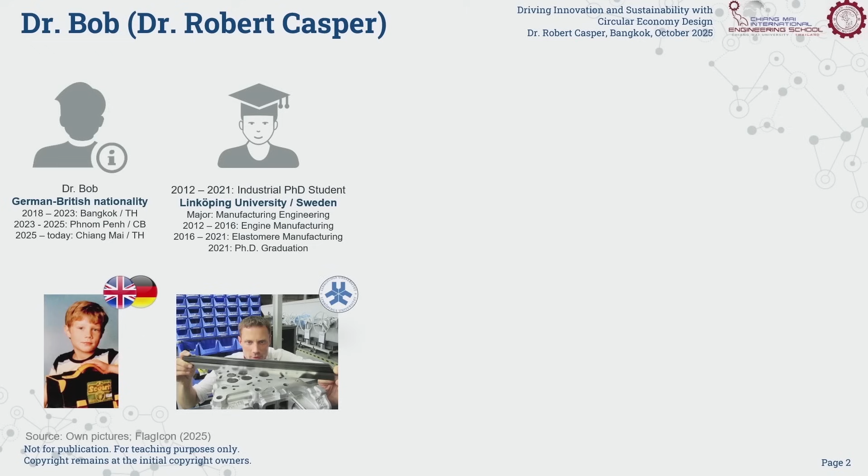And probably some of you know the colleagues Matthias and Eric. They used to be my PhD supervisors. And Linköping in Sweden is very much focusing on circular economy, and I just can recommend that also as a university contact partner to you if you want to have future partners in academia in that area.

Now today I'm a lecturer at Chiang Mai University after studying and working at Thammasat and doing lecturing in supply chain, circular economy, operations, research methodology and production controlling. But especially, I also do research.

I do a lot of research on sustainable production methods. I do papers, and I'm still assigned for my research topics with Thammasat University, with my old boss, Ruth Banomyong, with whom I work on research on circular economy.

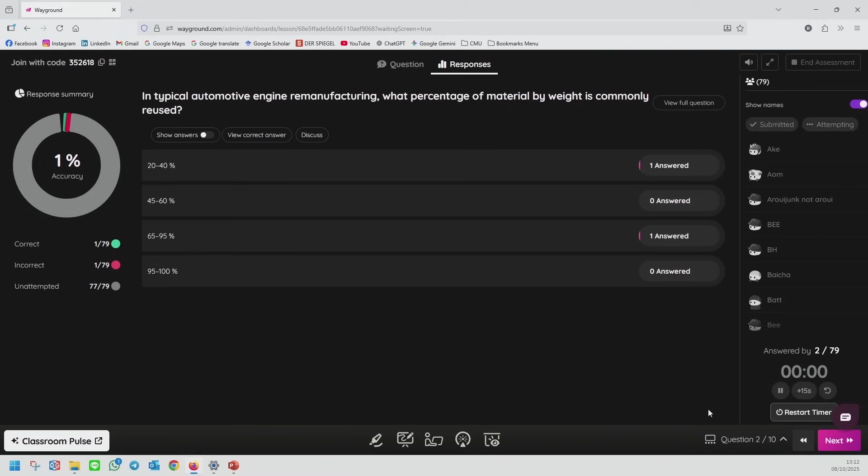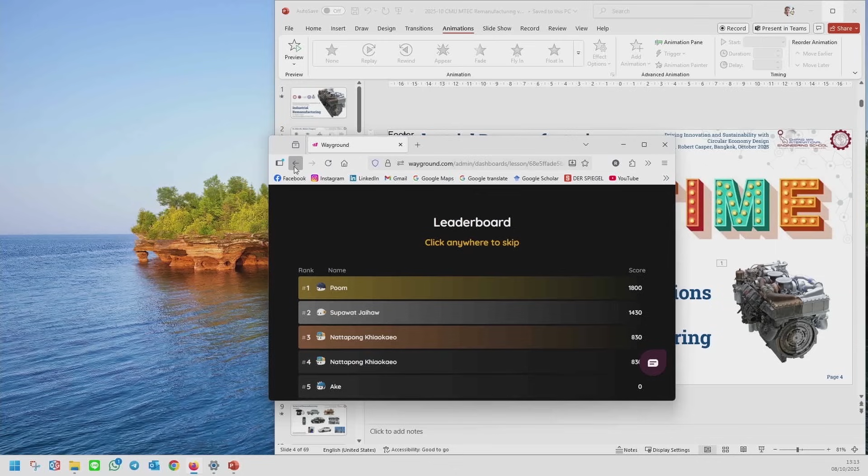Okay, good, let's hope that it works now. 52, 53. Well, at least the first question should be easy now. Okay, 62. 1, 2, 3, 4, and we start. Now it works, but where is it? Is it still at question 3? You see the first question? Okay, so first question again: what, according to international standard, must be true?

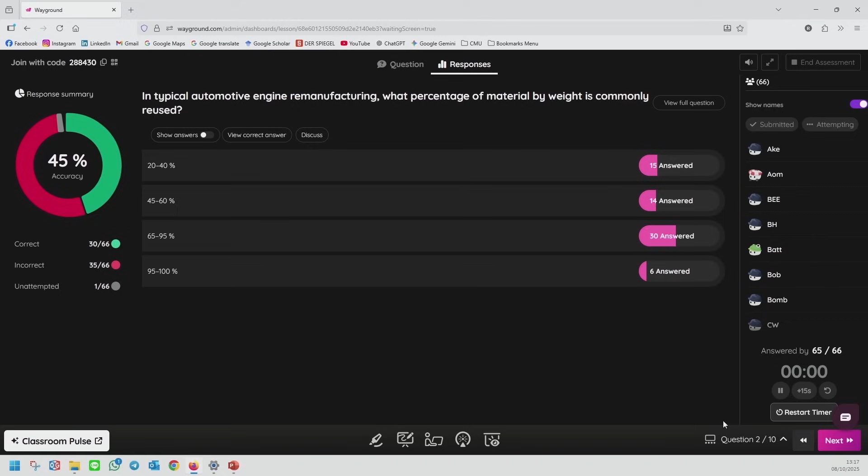And this one is not so difficult because actually I gave you already a little help. 64. 2 seconds, 1 second. All right. So there we are, okay, 65 to 95% of material, right? If you would weigh the metal, how much metal can be reused? Okay, very good.

Number 3, now this is a new one. Empirical studies show that remanufacturing an engine compared to new manufacturing can save approximately how much energy? Not material, energy: 10 to 20, 30 to 40, 60 to 80, 90 to 95%. Not talking about material, we're talking about energy now.

Remanufacturing an internal combustion engine, petrol engine, can reduce CO2 emissions by approximately how much compared to new production? So now it's not energy or material, now CO2: 15, 35, 55, or 75% of CO2 emissions reduced.

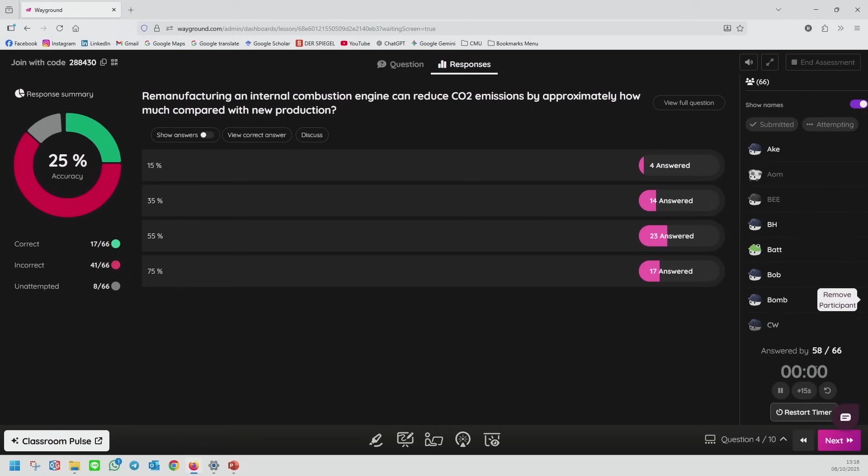Which factor most strongly influences profitability in engine remanufacturing? What makes remanufacturing of engines profitable? Energy cost per kWh, core acceptance rate, number of machining stations, or building size?

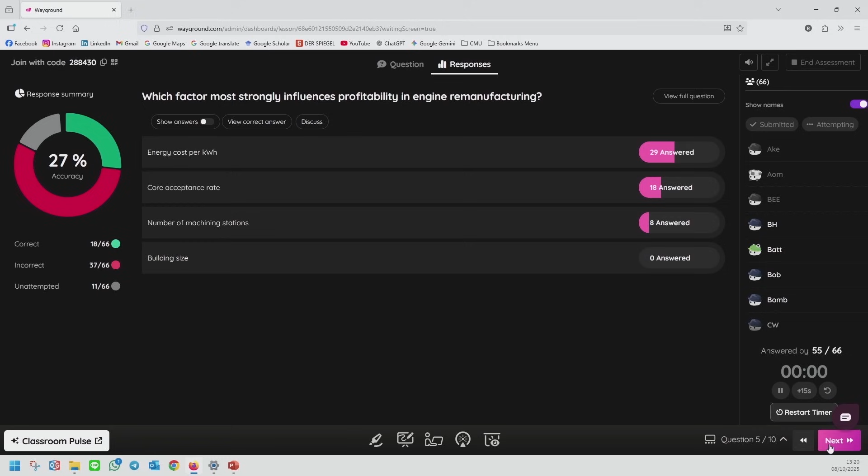Okay, we have a change to BH. But many people say energy cost. Energy cost in remanufacturing is not the most important thing. The most important thing is to have a core part. The core part is the old part which you put into your process and remanufacture and give it a new life. If you have a low acceptance rate, not good core parts, that is not good for your remanufacturing business. So that's the most important thing, the core acceptance, having good cores.

Which of the following is the most critical uncertainty in remanufacturing? Packaging material, core quality, customs import procedures, or warehouse lighting conditions? What brings uncertainty into remanufacturing?

Very good, so that's kind of the same story. If you receive a core which is not good, you cannot remanufacture it. But the core, when it comes from your customer, you do not know in which quality it is. So that's uncertainty. It's difficult to plan the core quality before you receive it. So that is a source of uncertainty, right? B.

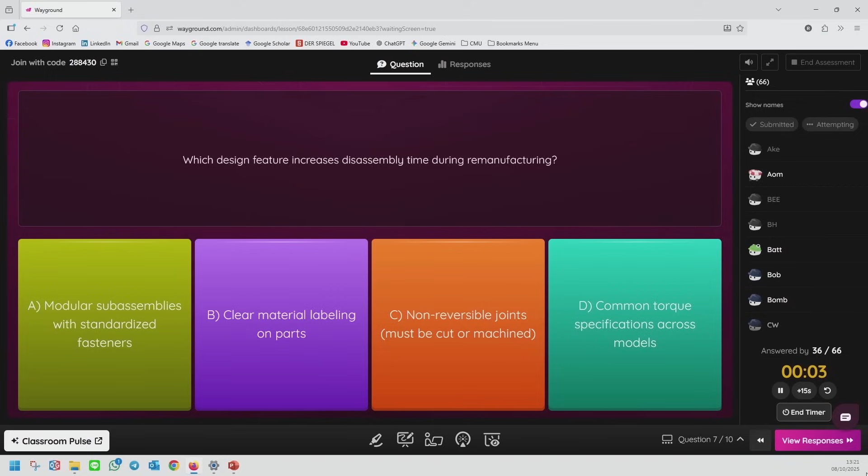Which design feature increases disassembly time, the time you need to disassemble a part during remanufacturing? Modular sub-assemblies with standardized fasteners, clear material labeling on parts, non-reversible joints that must be cut or machined, or common torque specifications across models? What makes disassembly longer?

So again, some change, right? It's non-reversible joints. If a part is joined together, for example welded, and I cannot reopen it because it's not screwed, it's welded, I have extra effort, extra work to open it, disassemble it, clean it, and check it. So non-reversible joints is making my disassembly process longer.

I think that's question 8, right? Which action is most likely to improve break-even performance for a remanufacturing line, holding other factors constant? Increase the core acceptance rate through better cleaning and machining processes, add an extra inspection step without changing acceptance criteria, increase the scrap rate, or paint casings earlier in the process.

That was fast, and it's also a difficult one. Many got it right. Same story again: if I have processes leading to more core parts I can use, by better cleaning, by better machining processes, I have more material which I can use and I need to insert less new material. So that is increasing my profitability, and I will reach the break-even point earlier in my calculation.

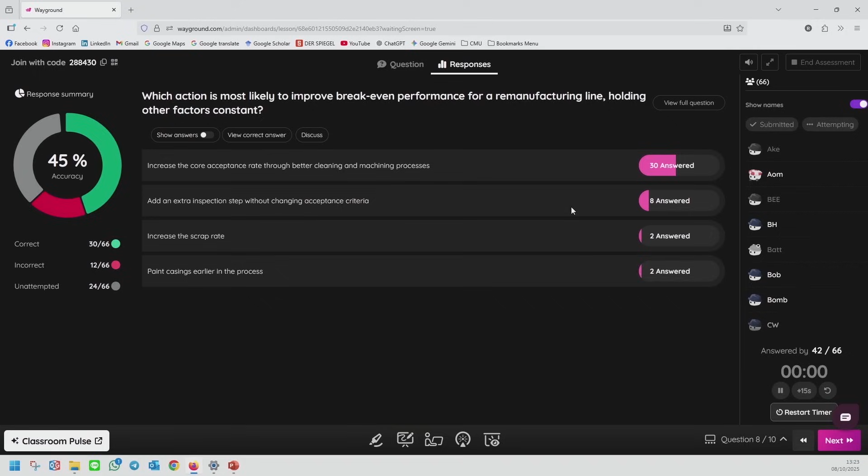Very good, I think now the last one is coming. Which of the following best supports design for remanufacturing in engines? Glue components to prevent loosening during use. Single part closed plastic housing for 100% dust protection. Replaceable wear liners and crankshaft bearing shells. Cast complex one-piece housing to eliminate joints.

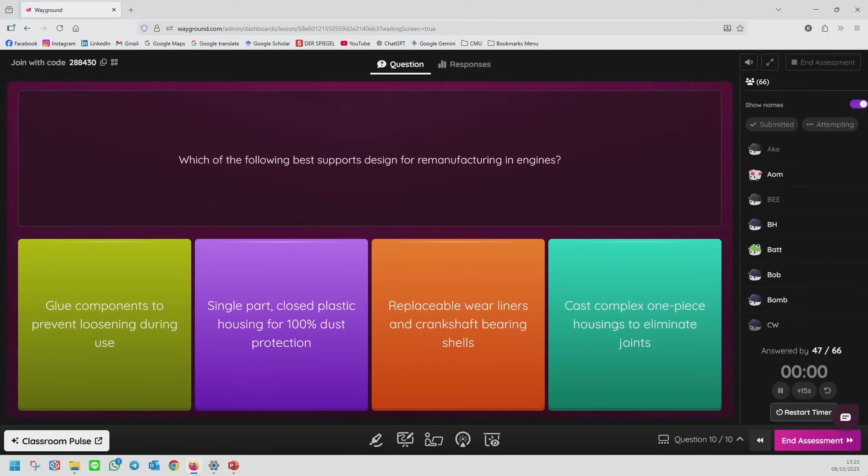Which supports remanufacturing? Glue components? Also a difficult one, let me explain. You want to have as little disassembly effort as possible, so gluing things means you cannot disassemble them, right? So gluing is never good for remanufacturing. A single part closed in plastic, you normally cannot open it without destruction — not good for remanufacturing. And a cast complex one-piece housing is also very difficult for disassembly.

So the best thing is if I have replaceable parts, right? Some replaceable shells which I can just open from a crankshaft, and I can easily replace parts. That's the best thing for disassembly.

And so now, the big moment, we will see the 3 winners. Do you want to end? Yes. All right, first place — well, we start with 3. First, Mr. or Mrs. Ake, or Ake, where? Or is it online? Ake. Mr. or Mrs. B. And number 3 was — I can't see them now in there. Are they 3 in the room, or might they be online? Where are the 3 winners? Not here? Well, then you don't get prizes. We got one there? No? Nobody of you here? Well, then we'll use the prizes differently. Okay, good, congratulations, they might be online. Is that possible? They might be online. Okay, they might be online.

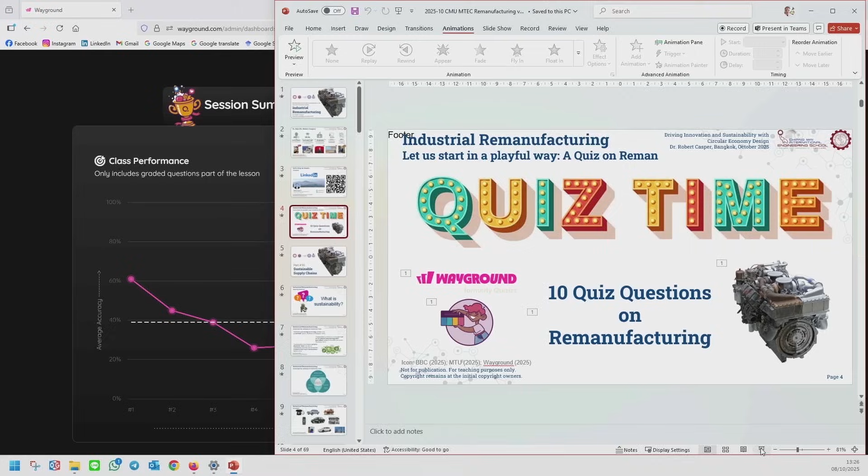So let me give that.

Okay, topic today is sustainable supply chains. This is a general thing I like doing with students, a general engineering thing. When we talk about things, first we define terms. So that's a question now, we cannot discuss that, right? But this is the first question I give to my students.

Hey students, you always hear the word sustainable. We all want to be sustainable. Thailand wants to be sustainable. Toyota wants to be sustainable. This is a buzzword, everybody using it. But do we really know what is sustainable? What does it mean? We need to define the term, right?

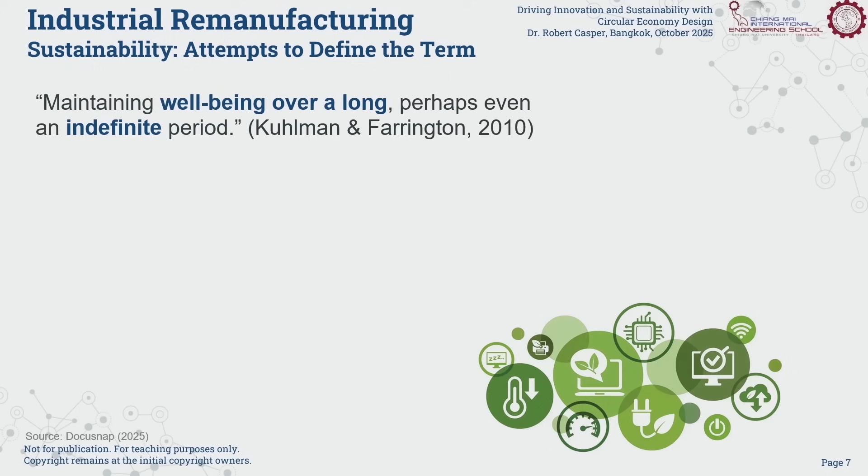And then, after we discuss that, I come with some definitions, giving some different perspectives. So maintaining well-being over a long, perhaps even indefinite period. Or sustainability is defined as meeting present needs without compromising future generations' ability to meet their own needs.

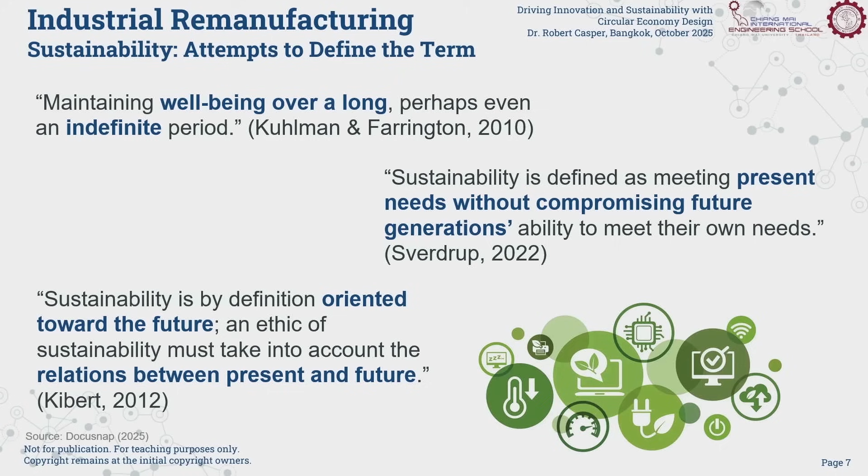Sustainability is by definition orientated towards the future. An ethic of sustainability must take into account the relation between present and future. So it has something to do not only with the environment, with green energy, it has something to do with the action I do today, and understanding the actions I do today has a direct consequence of what's happening tomorrow. That is sustainability.

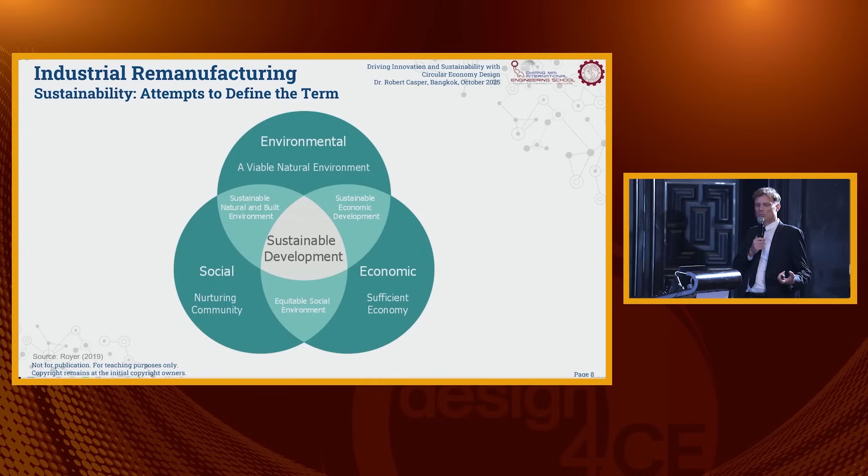And then I tell the students also, it's not only related to the environment. Sustainability has direct effects on social impact and as well on the economy.

And then I go into a little thinking, and I ask the students, and it might not work perfectly for you because we are a little bit older than my students. My students are 18, 19, 20 years old, they're young bachelor students, just coming from high school. I tell them, think of how the mobile phone of your grandparents looked like. And then think of how the phone of your parents looked like. It's probably our phone when we were young. Look at the phone you are using today.

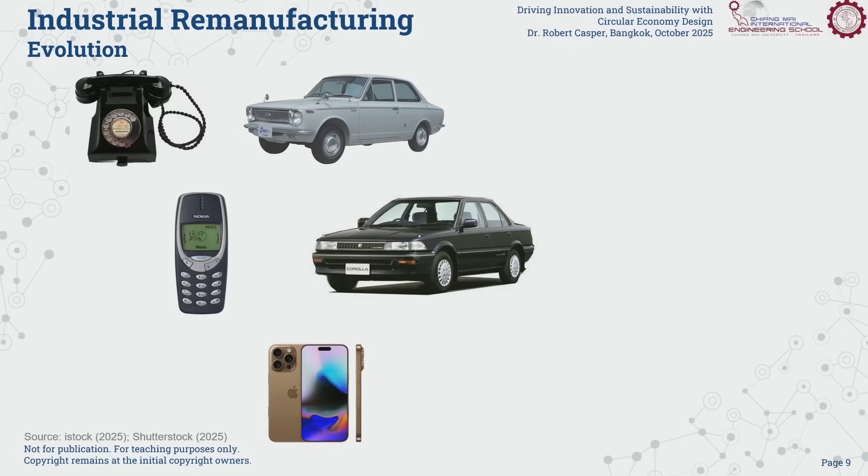Look at what kind of cars your grandparents were using. Look at what kind of cars your parents use, what kind of cars you have nowadays. Look at what houses your grandparents had, what houses your parents have, and how we are living today if we look out of the window.

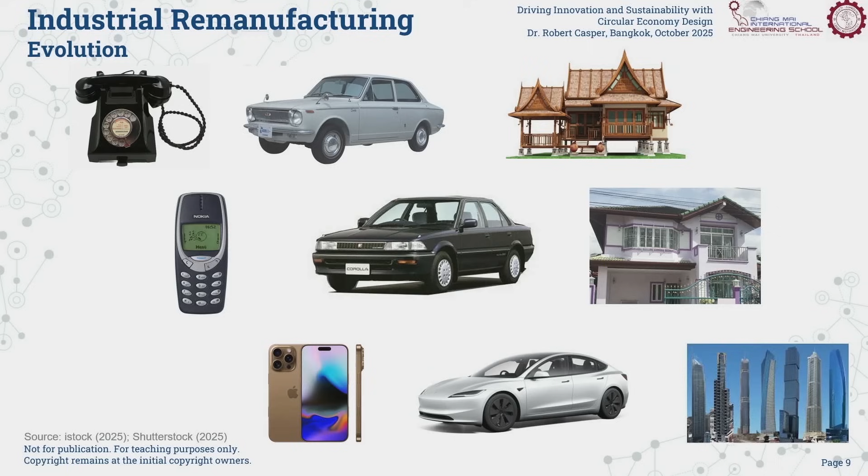And the students ideally understand that something has changed. The standard of living has changed. Which is good, right? We are happy that we might have a better life than our grandparents and our parents. But this has a consequence. Let's look back to the definition of sustainability. Our actions from today have a direct positive or negative influence on the future.

This is a very graphic, simple overview of material consumption, key material consumption, and the main inventions of periods. And that symbolizes a little bit the graphic we saw before. Understanding this is increase of standard of living, but with certain impact.

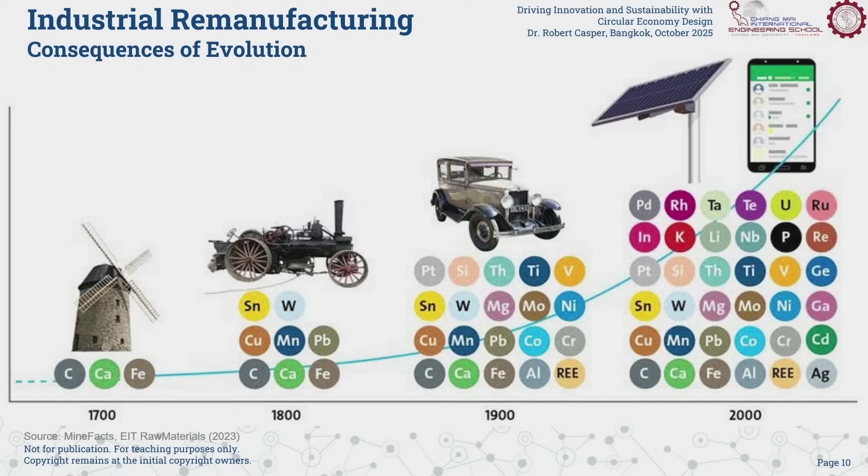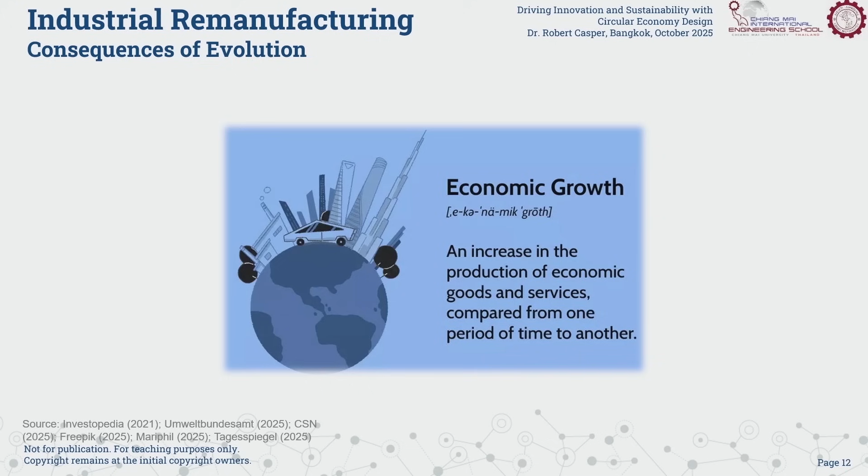Which is nice. Again, we are happy that we have a better life than our parents and have a better life than our grandparents. But economic growth is a nice thing, but it comes with consequences.

Let's again say, our actions have impact on the future. So, economic growth with the equivalent growth of material consumption also leads to more waste, to pollution, to environmental damages, to wars on raw material, to pollution of our sea, and to poverty. Sustainability, our actions have impact.

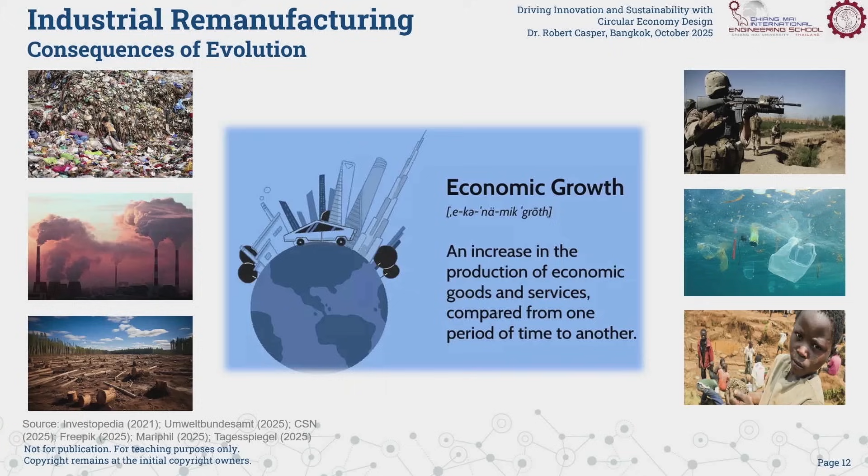And then some thinking changed. In the 1970s, some people understood that's not a way how we can do businesses. That's not a way how we can live life, right? Every year, we increase the economy, we raise the standard of living, we consume more, but every year we also use up more material resources.

And this is a classical understanding of a supply chain, a linear supply chain. And this, I took it from an actual book, like a school book from 2023.

So it's not a very old understanding. The entire system of producing and delivering a product or service, from sourcing the raw material to the final delivery of the product or service to end users. Very common understanding of supply chain, as we always teach it at university also.

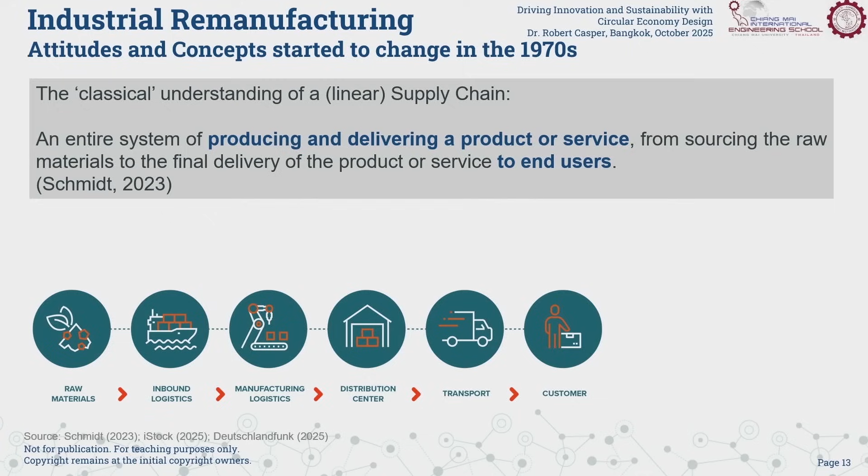This definition has one key problem, because it ends at a point where it should not end: delivery of the product or service to end users. This is not the end of a life cycle. So normally, at least after consumption, the product must go somewhere. There's waste. After consumption is waste.

And the classical concept up to the 70s was, with the waste, either we put it on landfill and forget about it, or we burn it. These were the concepts, right? So that is a little bit an extended linear supply chain. This supply chain thinking of the 70s - take it, make it, use it, and waste it - was a little bit narrow-minded. It forgot something.

And then in the 70s, 80s, recycling came up, where people tried to give material a second life. Collect them and think how we can recycle the material and make something new out of it.

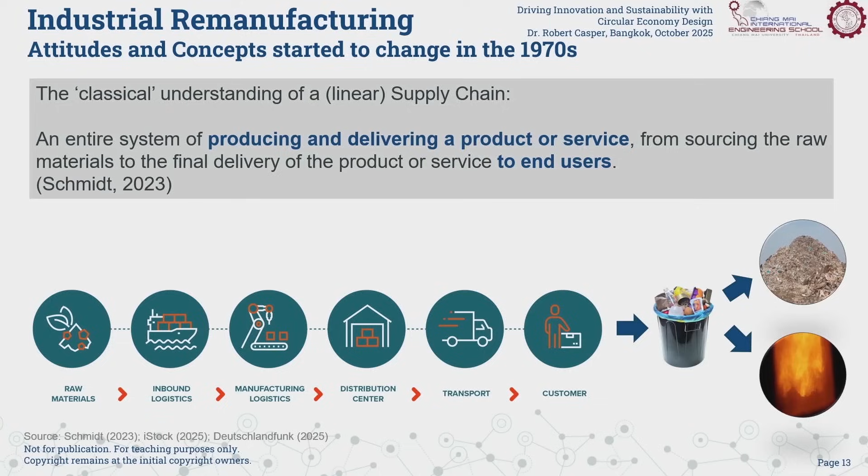And later, circular economy, where I come now to, went one step further. Recycling is not the only way to find a closed loop supply chain. Let me go back - linear supply chain, no loop. There's nothing going back, right?

But to close the supply chain - this was the model from probably 2000, closed loop supply chain, the first time those terms have been used. And these are common ways to close the circle. We see again the supply chain on the top: by reusing, from waste to user is reuse; or from waste back to the industry is remanufacturing; or from waste back to material transformation is recycling. So these are the three main concepts for gaining a closed loop supply chain.

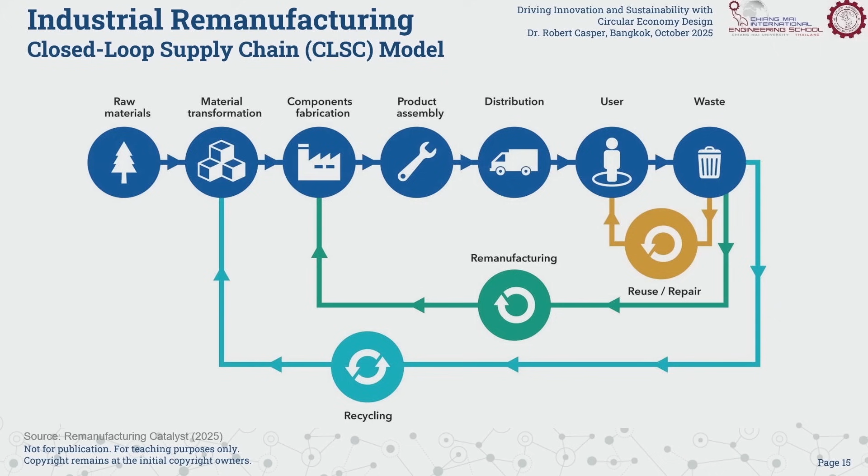I skipped now a little bit the definitions. I think we are all on one page about what's the overall idea, right?

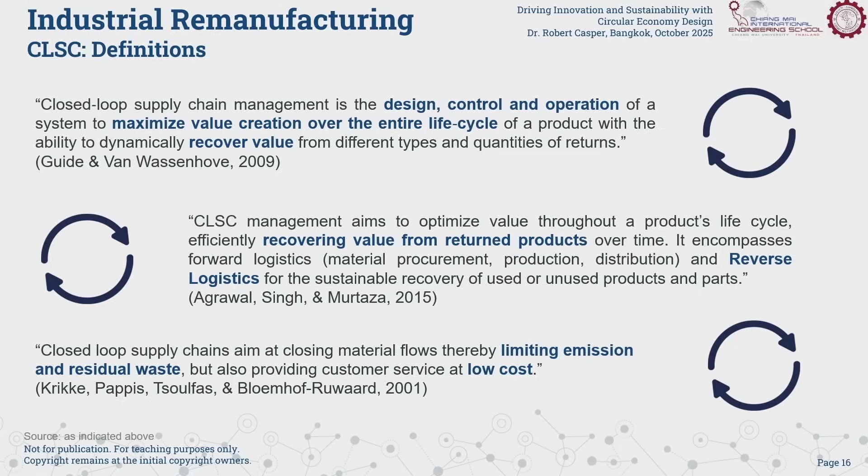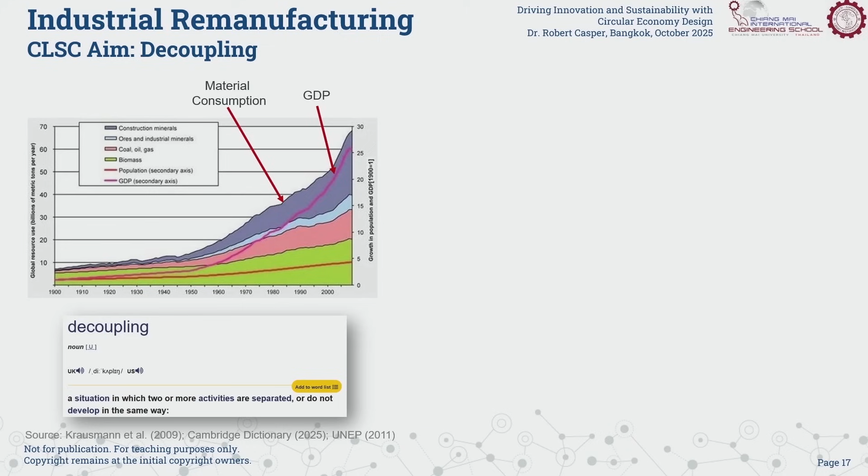That is one aim, and that graphic actually makes it clearer. We are actually in status 1 - we don't have a real decoupling, meaning we have economic growth where resources are spent at the same speed as the economy grows. If we have an economy where the economy grows but material consumption increases slower, it's a relative decoupling. If we have economic growth and material consumption even goes down, that would be an absolute decoupling.

And that would be the overall aim, right? We still have an increase in standard of living, we still have a growing economy, but we use less and less material. But this is a future scenario - we are still here in status 1. We are dreaming of number 2, and number 3 would be something which hopefully one day will be gained.

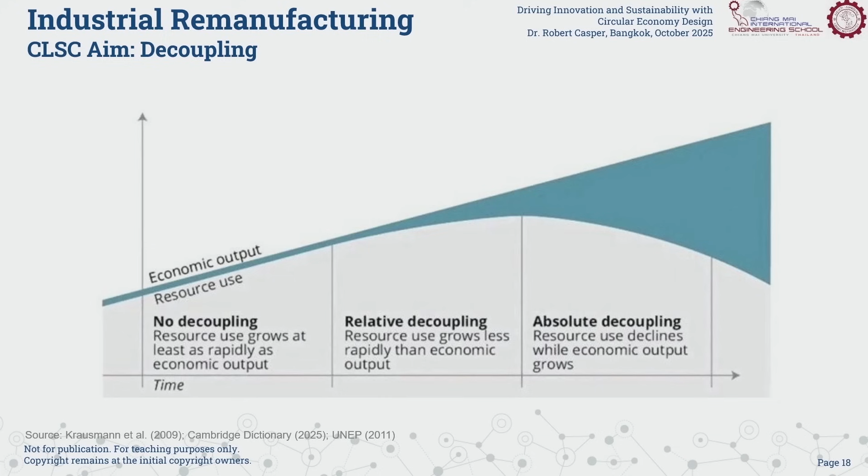So what kind of advantages does circular economy have? It has many, I can tell. I'll look at the clock - I'll go a little bit fast because I want to give you a practical example, so I'll go a little bit fast.

Again, circular economy is not only green business - it's not only thinking of the environment. It has different perspectives, and we just had a discussion outside. One thing is important: at the end of the day, people will not only decide for environmental friendly options. Companies will only decide to set up closed-loop businesses if the economic perspective is also working.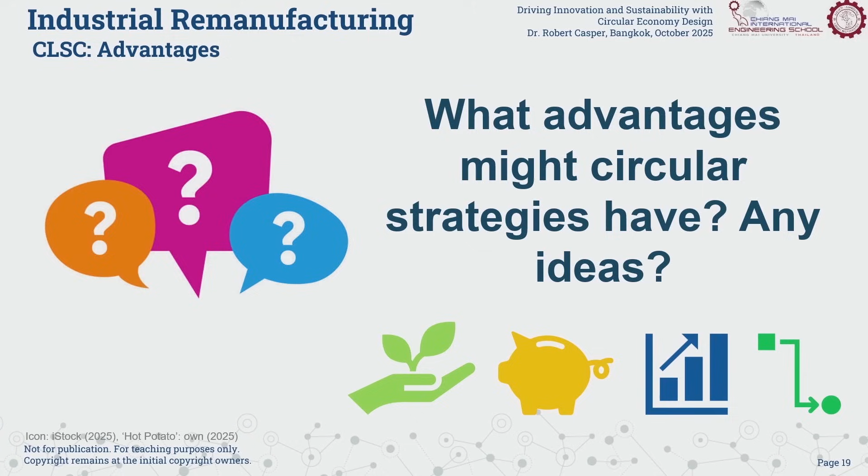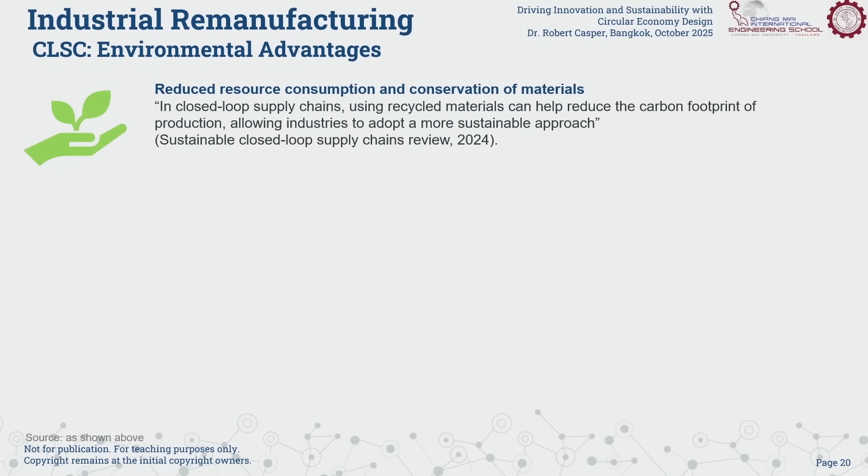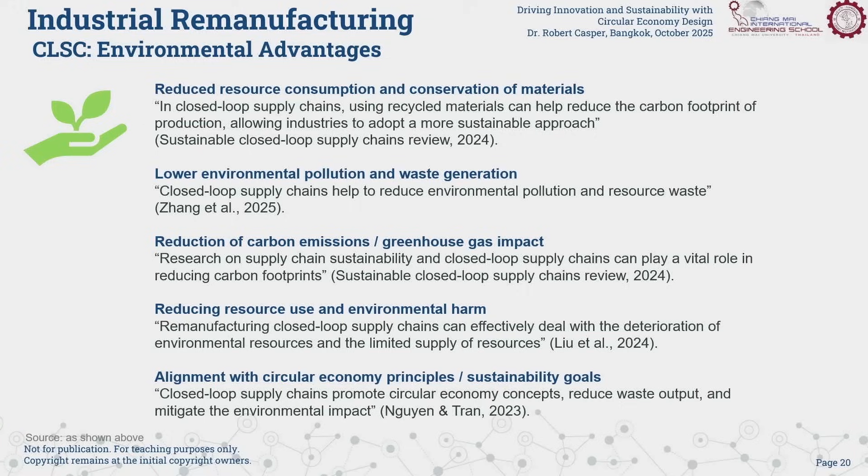Because we will all say, okay, we are very ethical, we always take green options. But when it comes to the decision between two products, consumers often take the cheaper one and not the greener one. So both must be given - there must be economic advantages and environmental advantages. It must be green, less material, less pollution, less emission, as we heard in the quiz, harming the environment less and supporting our political aims for a sustainable business or society. But at the same time, and this is possible, there should be cost saving, because if I use less material, it should be cheaper.

If I can reuse material, it should be cheaper than the new part. But what is happening, we all know - if we look, for example, on recycled plastic, and we look onto the market of recycled plastic as of today, it is more expensive than the same quality of new material.

So guess what the industry is buying? But it's possible, right? It's because we have advantages. If I generate less waste, I also have less cost to dispose that waste. I can be more improved, I can be more profitable if I use the resources efficiently, and so on. I don't go too deep, but at the end of the day, it must be a business also.

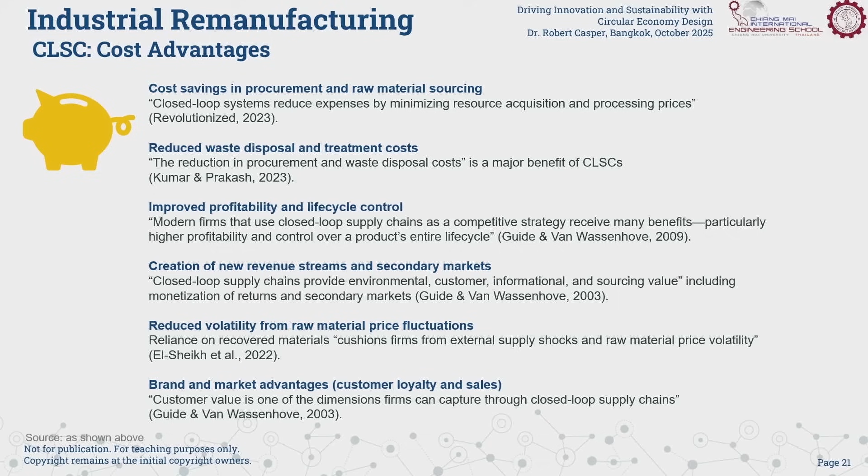And there are business opportunities for reuse. There are many examples in different industries, for example, where we have companies renting out machines, forklifts. They bring them back to their own company, repair them, and sell them again or lease them again, right?

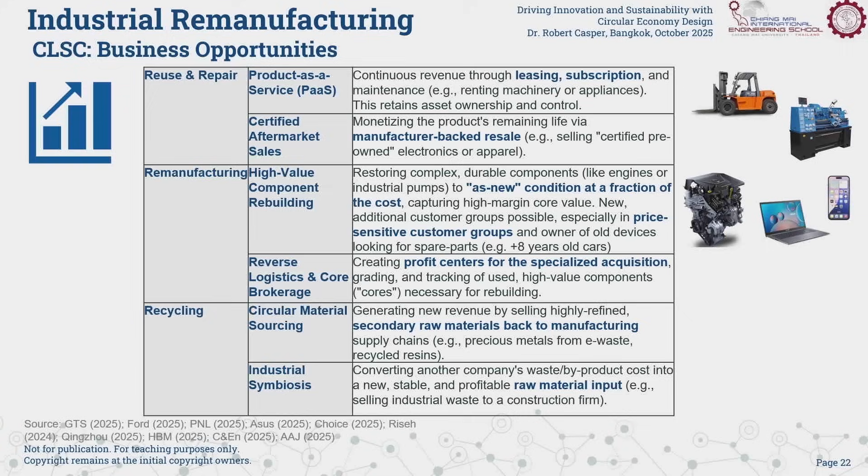We have a lot of business, and we will look into remanufacturing or refurbishing. Car manufacturers bring the parts back from the market, making sure they don't go into a black market or gray market, collecting the products, investing, but then also having a new business. Same exists for IT devices, notebooks, smartphones, often in leasing contracts with companies. They get them back anyway, right? And with little effort can refurbish them and resell them again.

And certainly also recycling. Why is recycling coming at the end? Remanufacturing and recycling are two different things, right? Remember, closing the circle - recycling is one way to close the circle, but recycling is breaking down the product into its raw material and then making something new out of it. From the value creation, from gaining the initial value, remanufacturing and reuse is better than recycling.

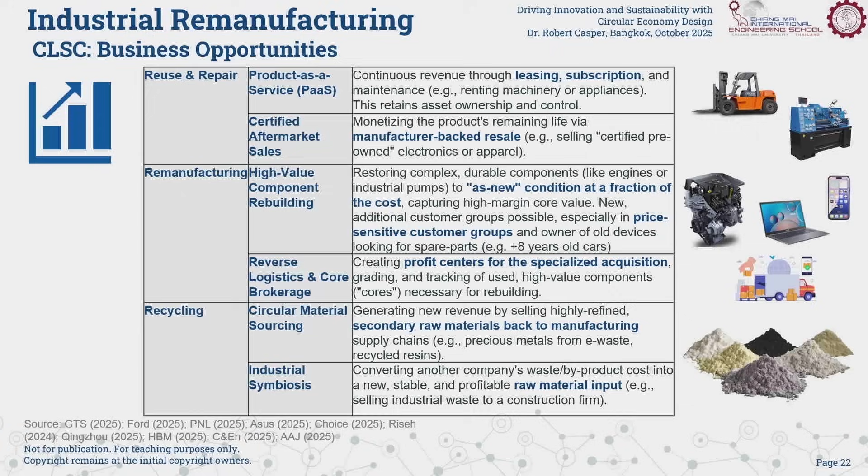All right, so recycling is done, and this is good, but just like when it comes to what kind of energy is inserted into the process, it's the one where you need to add most effort again. I'll skip that, too deep.

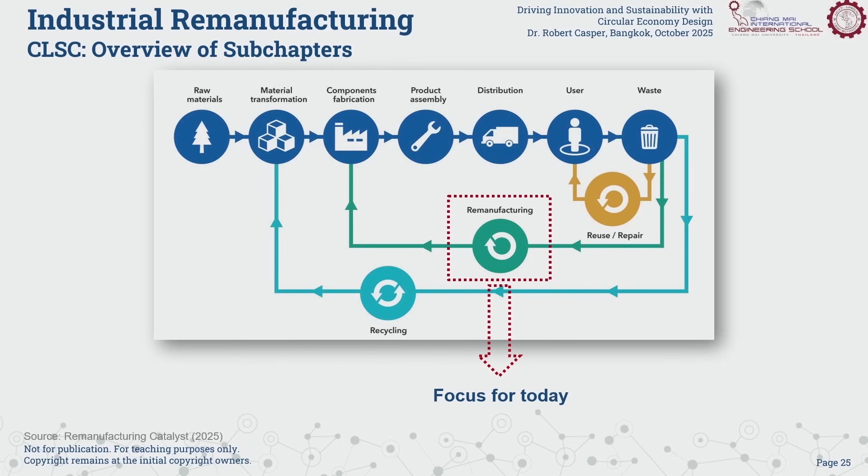Then, that's the concept again. So I also teach about reuse and recycling, but today we are focused on remanufacturing, and I want to give you some practical information on remanufacturing also. So what is remanufacturing? And we had it also in the quiz.

Remanufacturing is a procedure of bringing used products to like-new functional status with a matching warranty. Or, remanufacturing refers to an industrial process in which used products are transformed into remanufactured products with a quality condition that is typically as good as new. Remanufacturing is a standardized industrial process in which cores - that's the old part - are returned to same as new or better condition and performance. So in summary, it's an industrial process.

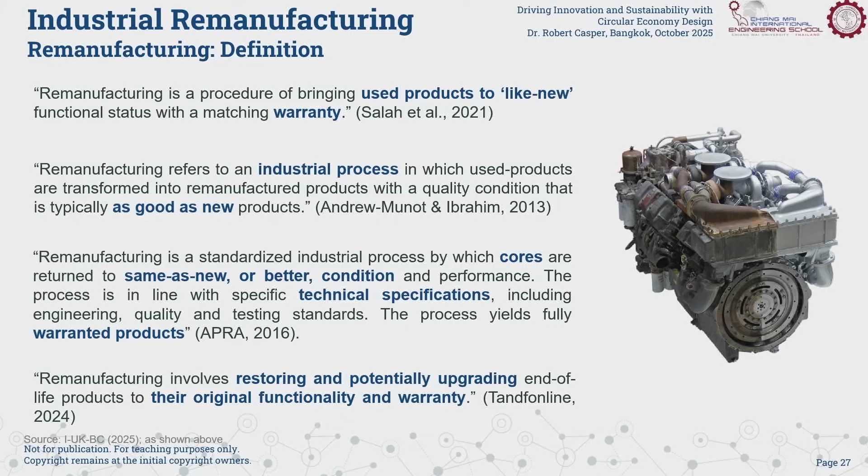It's not like a little shop on the corner repairing something and saying, here we got a remanufactured engine or something. It goes back normally to the OEM, to the original company. A remanufactured Toyota motor goes back to Toyota - they do it, right? Or Apple is doing their refurbished phones. But there are also independent companies doing it. It must meet all standards, all technical standards of the new part, and it must have warranty.

Different to recycling, I said that already - recycling is breaking it down into the material. But a remanufactured engine is still a remanufactured engine, right? The engine stays an engine. The phone stays a phone. That, from material consumption, from gaining the initial value, has a better impact than breaking it down into its components.

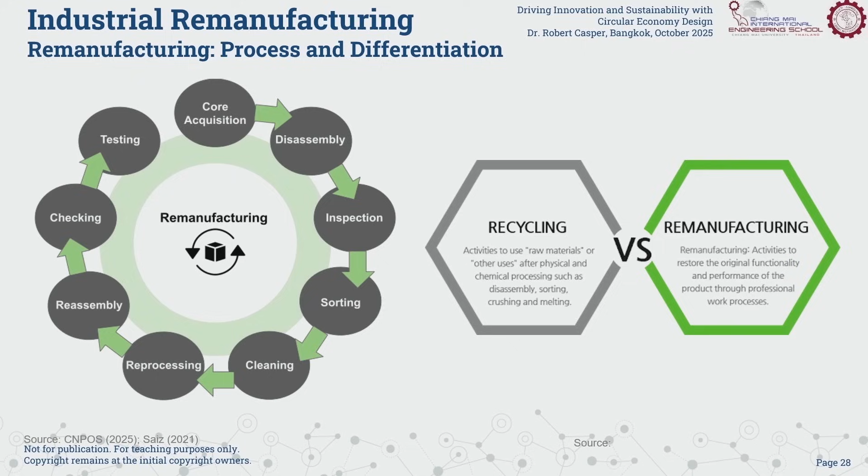So how does a typical process of automotive remanufacturing look like? Reverse logistics, meaning the part comes back to the company, we have a visual inspection, and we have this first-time scrap for parts which cannot be remanufactured, for wear parts which are directly scrapped. The part is disassembled - again, in the disassembly process, certain parts are always scrapped, for example joints, gaskets, seals, and something like that.

The parts are cleaned in a technical process, and then the big inspection is coming - do the parts still meet technical standards? If not, scrap. Then machining. Machining - I have some videos of how the parts are machined.

As we scrap certain parts, the wear parts and parts out of spec, we need to enter some new parts. Testing process, forward logistics, goes again to the customer. Ideally, the forward logistic is kicking off a new reverse logistic, because the customer had an old engine there, right? He has a reason to change. Picking up the old engine, that's the new core part for the next business. Let's not forget, no core, no reman.

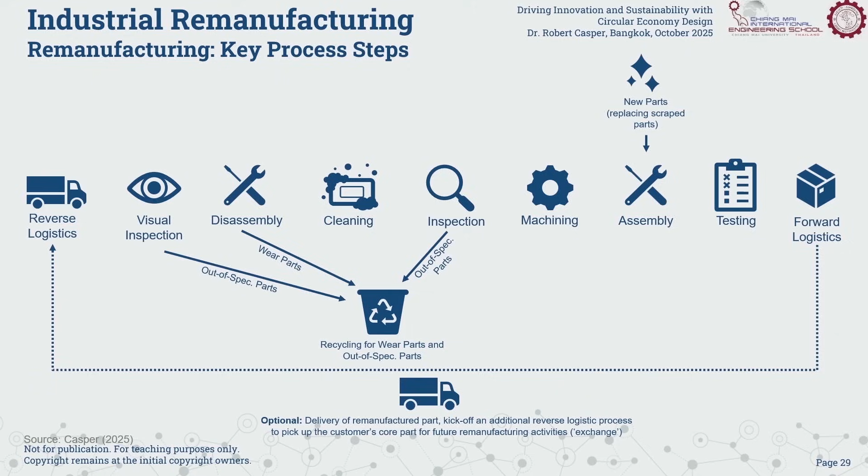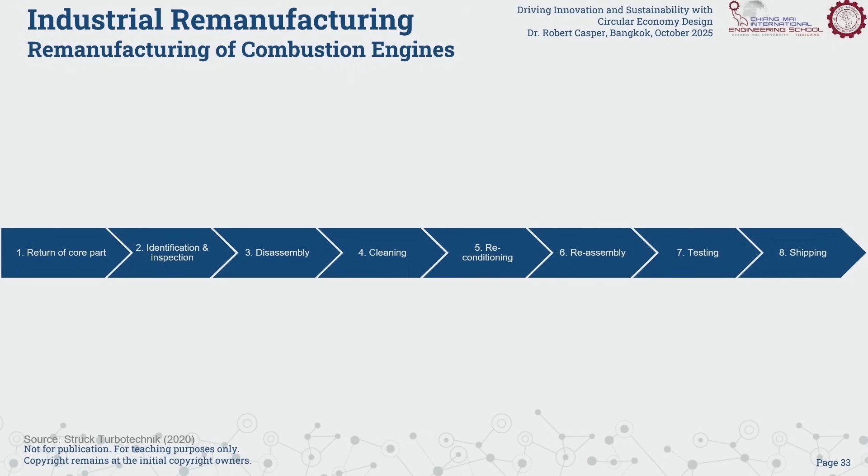Let's look into some practical examples. That's the circle, I don't repeat it. I'll give some pictures of a company. I was doing an internship for some months at an engine remanufacturer in Germany.

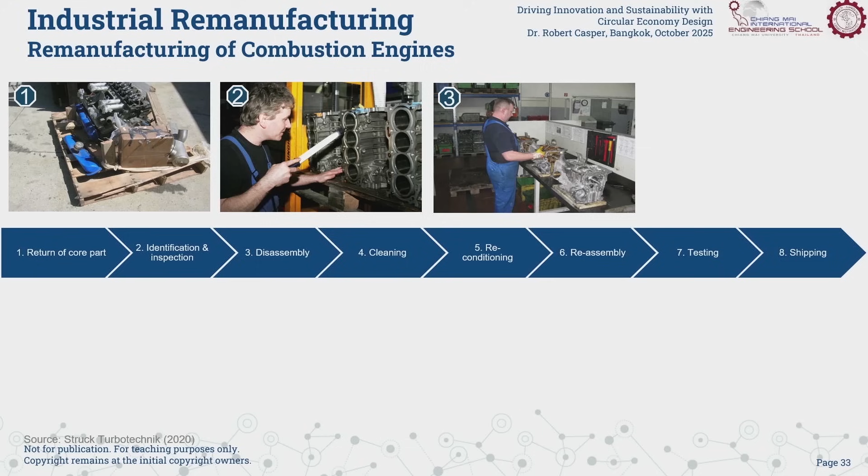Core part reception coming from the dealer. The dealer sends the part. Part first inspection - for parts which are not remanufacturable, I don't need to clean and disassemble them, right? Directly scrap. Then disassembly into all kinds of components. Technical cleaning processes depending on what kind of material has been used. Machining, here drilling and honing of cylinder liners. We'll look more at that.

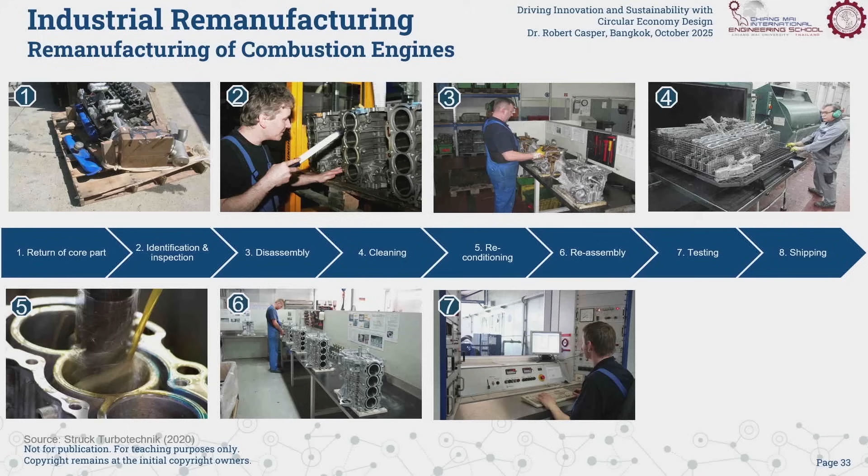Then final assembly line, inserting the new parts. Hot test bench. Testing, shipping. Let's look at some components.

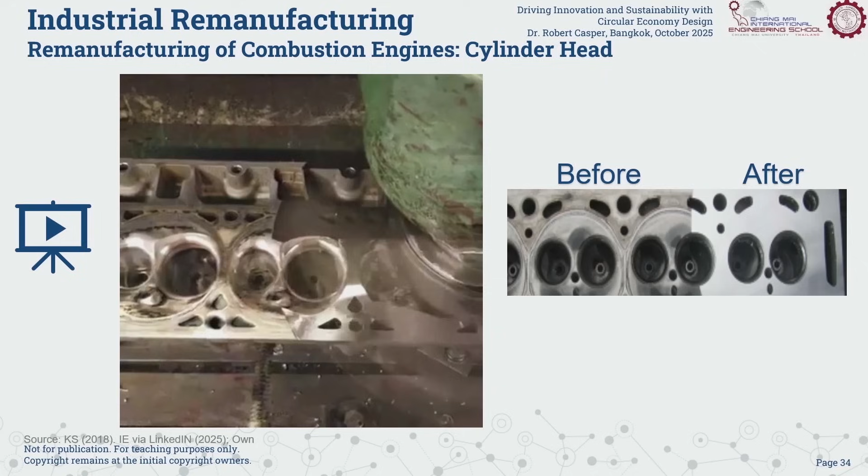Crankshaft - don't ask me why that music is there, it's so relaxing, right? But it's probably so relaxing, the process. So crankshaft, right, where the piston is attached, and we have the bearing parts here. We have wear and tear there, so there we must have a grinding process, again before and after.

And as we take away metal, it's thinner. Then we need to have a crankshaft bearing with a higher size, and we come back again to the original size.

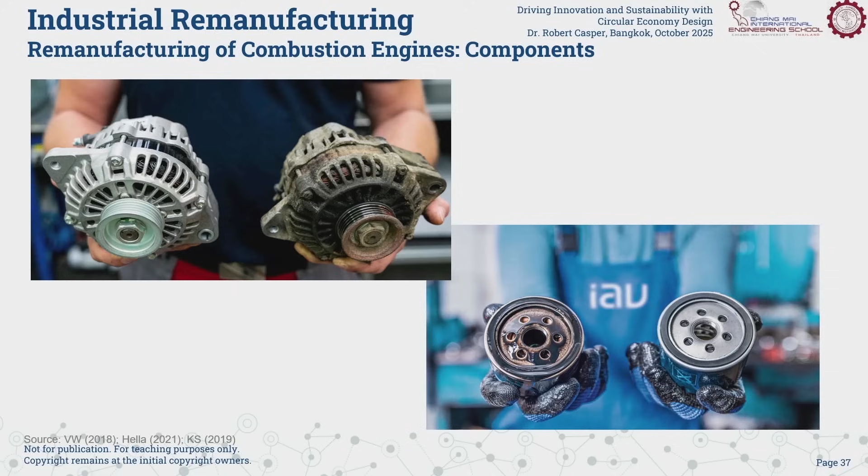Sandblasting of components, very easy and comes to good results. Remanufacturing of components, here the generator. Here an example of an industrial engine from Deutz.

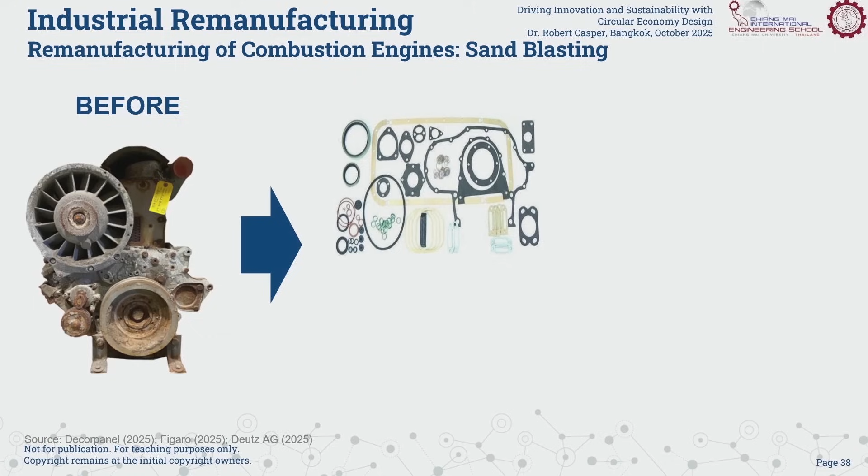You can buy gasket sets. In these gasket sets, all the wear parts are in one set - piston set, piston rings, piston pins, bearings - and then assemble again as a new part.

And you see here directly why we can save so much material. The vast majority of material of the engine has not been changed, right? And that's the reason we save material. And because we save material with metals, we save energy, right? Because melting that down, that engine, and then having the raw metal again, melting it again to mold it into something new takes more energy.

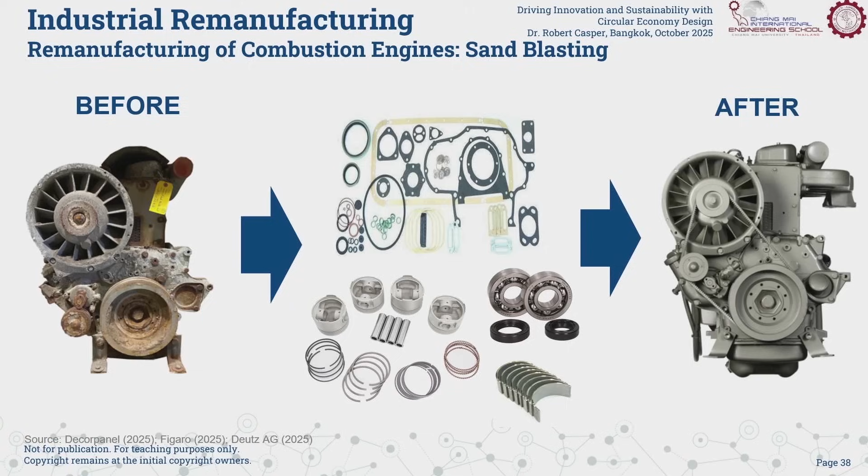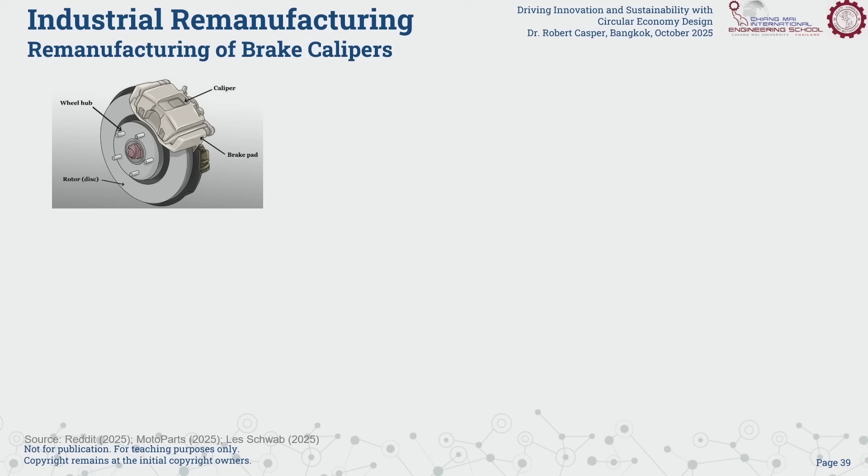Remanufactured brake calipers - that's a brake caliper, but also a brake caliper has very few wear and tear parts. Actually, only those are wear and tear parts. All the other parts can be cleaned, tested, and reused. Just insert these minor parts and then you have a remanufactured brake caliper, which then looks like this.

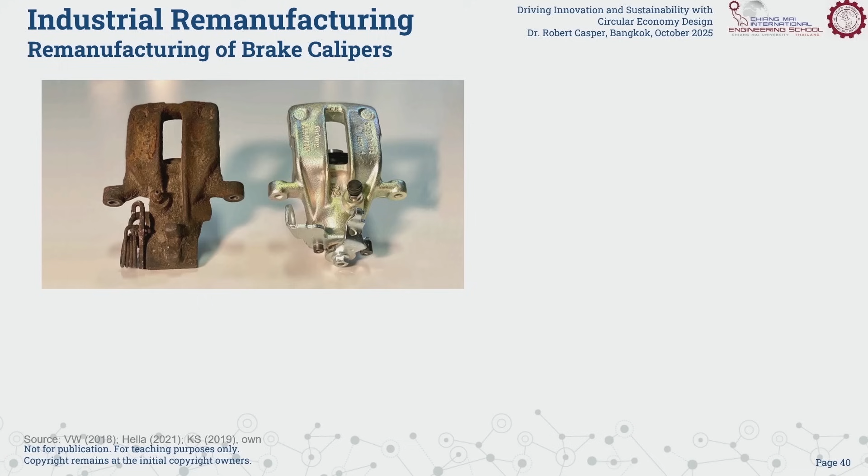Is a new part, right? So that changes everything. Remanufacturing of car parts is not new, it exists since 50, 60, 70 years, right?

And now we got new products, we got batteries, and with batteries, all the old parts - all the combustion parts, turbocharger, gearbox, combustion engine, turbocharger - they all are not needed anymore. We have very few turning parts, especially the electrical motor. Electrical motors have significantly less wear and tear than a combustion engine. So actually the part which needs remanufacturing is the battery. And we are still very much in the beginning of that.

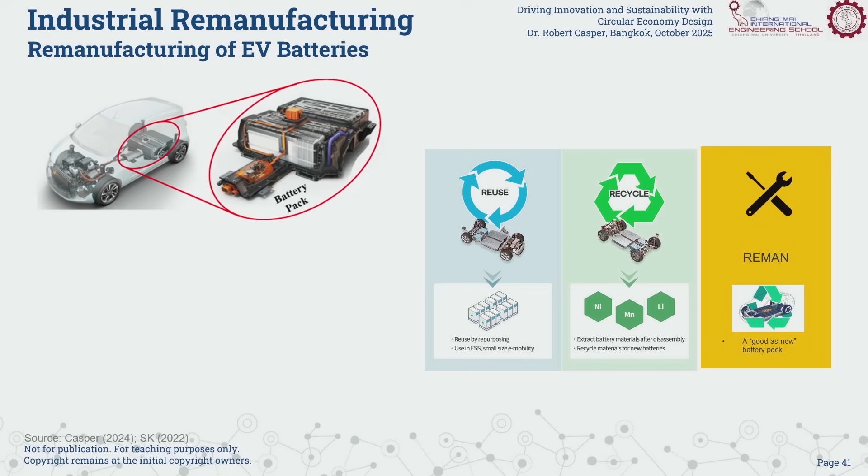This is a research I did with my colleague Ruth Banomyong. We looked at the Thai automotive industry, but this information is from 2023, 2024, so there might be some changes. We looked at all companies - what are they building? Are they building EVs? Are they building BEVs?

Are they building hybrid cars? Where do they build the battery? And especially, do they have battery recycling? So status 2024, there's no Thai company. And we asked them, all are thinking of it. So because, let's again not forget, sustainable, your actions from today have an impact on the future.

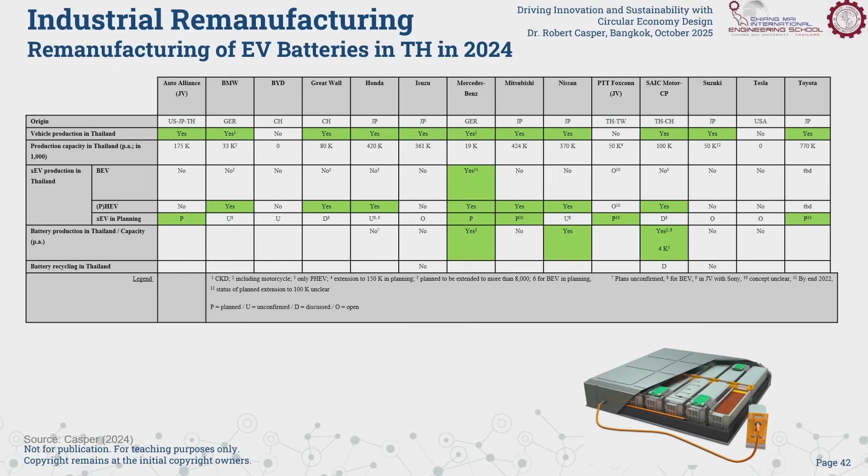We especially are implementing BEV cars because we want to be more sustainable. But where do you stop the thinking? Again, think of the old supply chain concept. Do I stop thinking in my consumption, or do I also think about the waste?

This is a little bit in the process of just starting for EVs, that companies also start thinking, hey, what do we do with all the old batteries? Because they will come, right? The cars are now on the road, but after 6, 7, 8, 9 years, all the batteries will come. The first come now, but there will be a wave of batteries coming, and I'm not sure if all companies, not only in Thailand, but all over the world, are prepared for that.

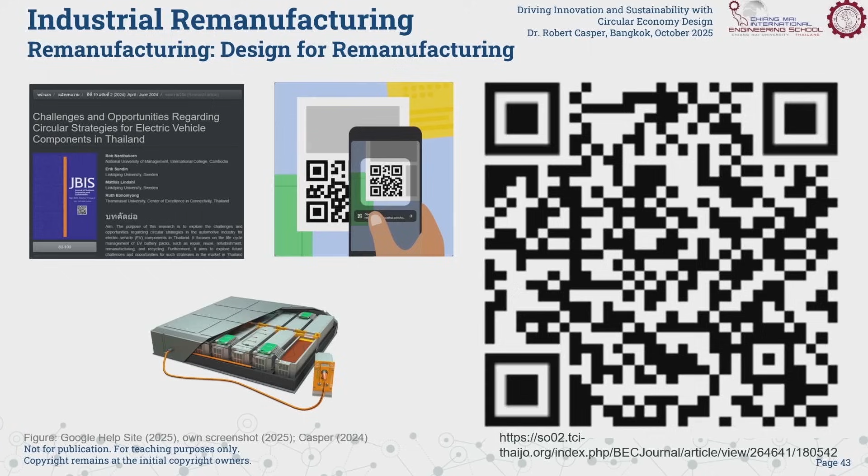But that is ramping up. Remanufacturing for batteries, it's existing and technically possible to do. I'll go quick to show as much as possible.

Remanufacturing of tires, old business, right? You grind the old surface. The tire itself has not so much wear and tear, just the surface which is in contact to the street. So you separate these two things and you mold a new surface on top. It's not so much important for car tires, but for expensive tires for trucks or tractors or something like that, for industry tires of high importance, and it exists.

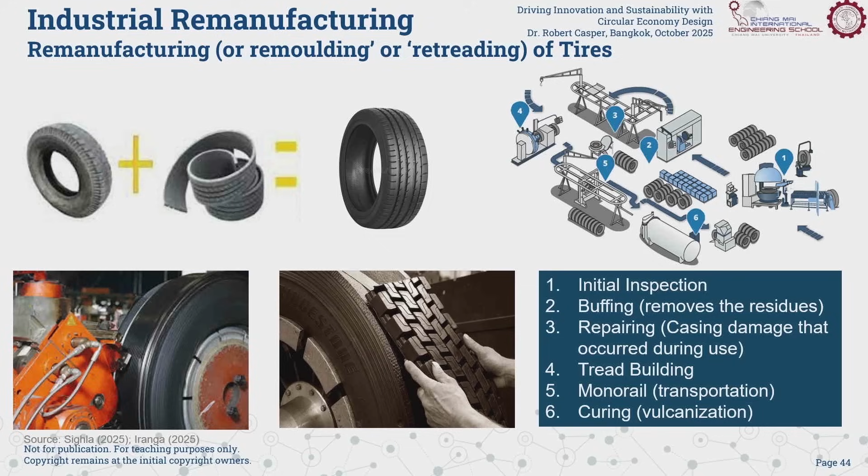So we have remanufactured engines, turbochargers, starters, generators, gearboxes, AC conditioners, and more. These are established businesses, and it's running, right? Depending on the market, they have a high market relevance or low. In Asian countries, rather low, which has something to do with perception. How do people think about remanufacturing, right? Do you see it as lower quality and cheap, or do you see it as a good opportunity comparable to a new part?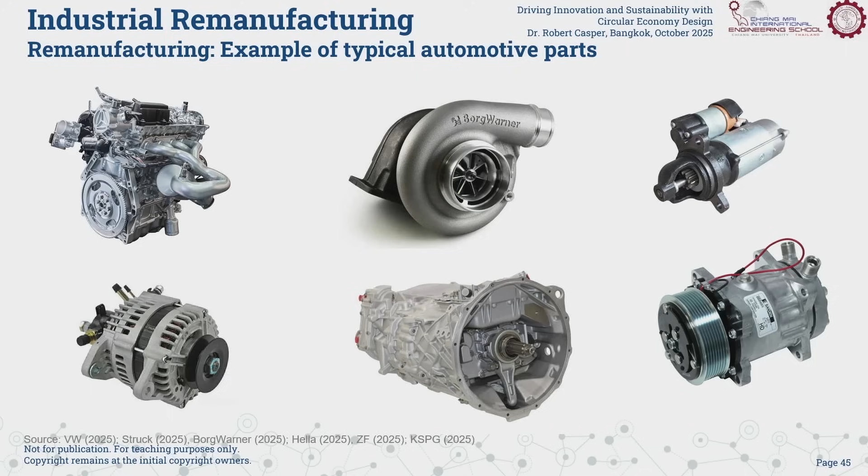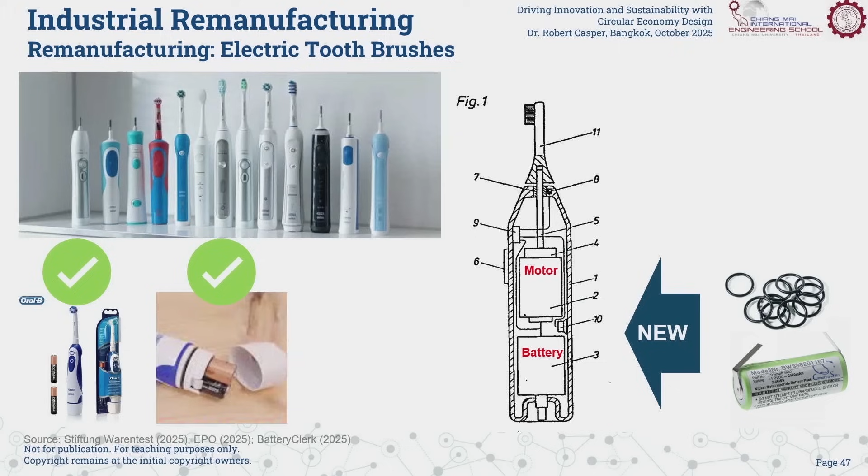Consumer goods, quickly. Electric toothbrush has hardly any wear and tear, adding some new sealings, cleaning process, and then it's ready, and we can hand over to the design. Some have a good design, and I can open them, and I can change what I need to change, and some I cannot open without destroying the housing. And this is also something from the quiz.

A key process in remanufacturing is disassembly. If you cannot disassemble a part, you cannot remanufacture it. This is something design for remanufacturing is thinking of. If you only think about consumption, you don't think about disassembly. But if you also think in the design process that probably one day these parts need to be disassembled, then that might make sense, and you think further than just to the consumption.

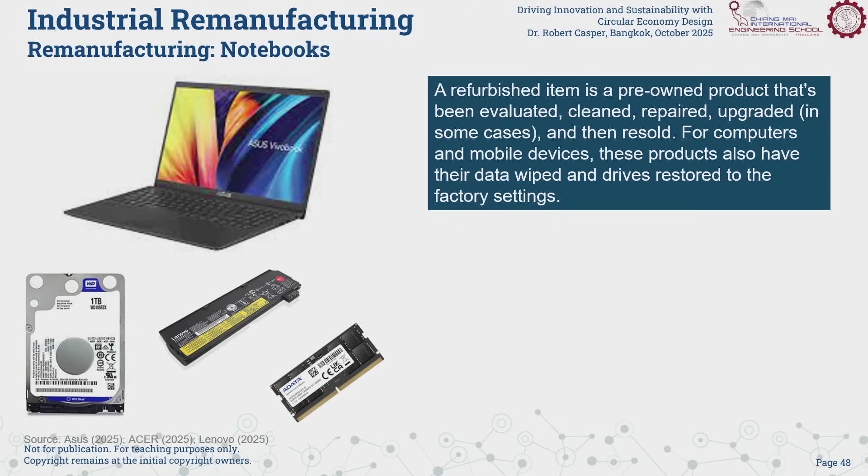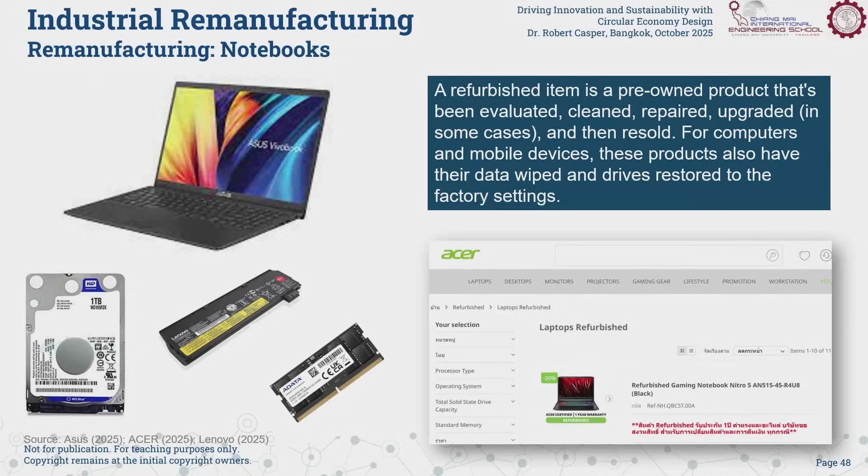Remanufactured notebooks, we had that, just adding a new memory, new battery, probably some updates, and they are sold on the same line. You can go to the Acer or Lenovo website and you can look, they call it most often refurbished notebooks. Phones, you can go to the Apple site. Apple is selling on their website refurbished phones with full warranty. You can buy at roughly 60% of the original price, full warranty.

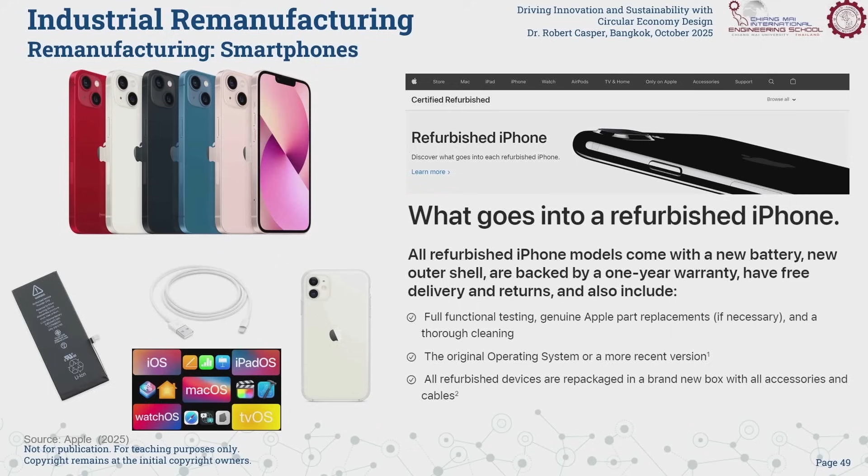But we also have investment goods, copy machines, 5 minutes. Copy machines or toners, and this is a video, but it's 2 minutes long. Well, I only have 5 minutes. No, we skipped that.

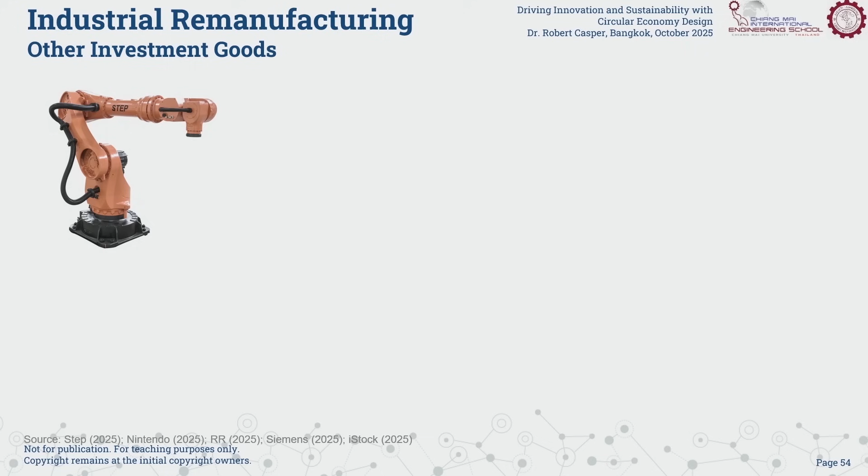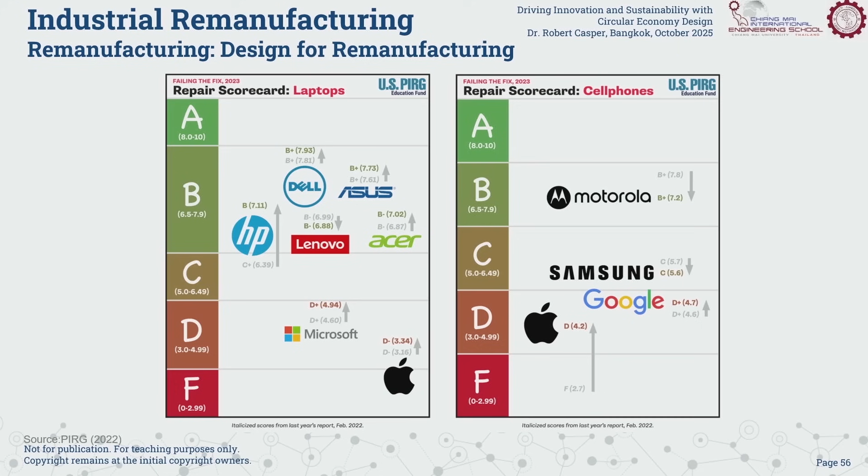And what I just said, design for remanufacturing. Some manufacturers think very early that these parts probably are refurbished or remanufactured, some less. Some, and this is an initiative in Europe and in America, right to repair. We should have a right to repair. Why? That should be like a normal thing, right? But this is what does the director say?

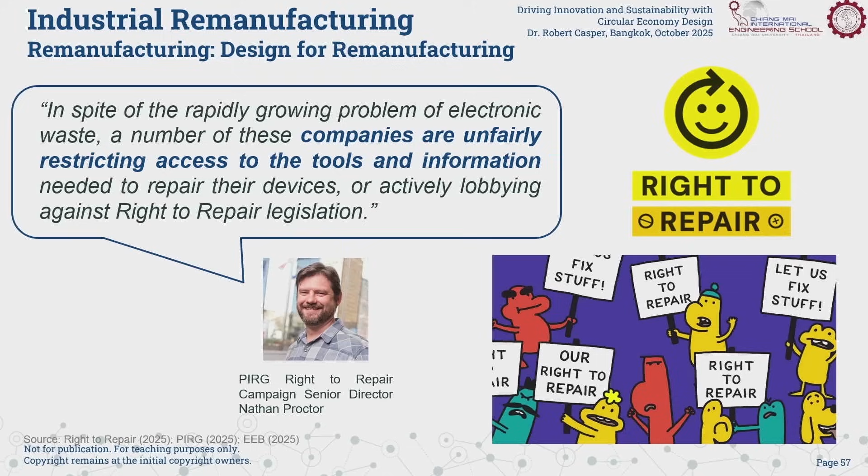In spite of the rapidly growing problem of electronic waste, the number of these companies, and he means the manufacturer, right? Lenovo, Apple, these companies are unfairly restricting access to the tools and information needed to repair the devices, or actively lobbying against the right to repair. Why do they do that? Because they still earn more money with selling the new part. Right? So probably the older ones of you, including me, can still remember that we had phones where we could change the battery.

The famous Nokia, right? We just open it and put the battery inside. Why do I need to throw away a phone because the battery is not working anymore? And these are now initiatives coming where we say, okay, that is normally a standard thing. The companies must think of something like that in the design process.

So what are the roadblocks for efficient remanufacturing? Technical things: there are no spare parts, there is no machining, there are no standardizations. We cannot disassemble the part. We don't have the testing equipment or knowledge to do it.

Economic: remanufactured parts are always in competition with the new part. The nicest remanufactured part will not be bought if it's pricey, if it's more expensive than the new part.

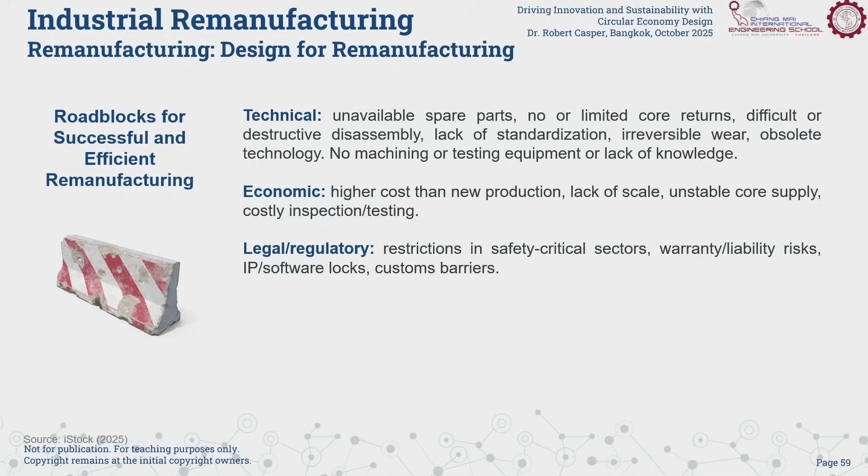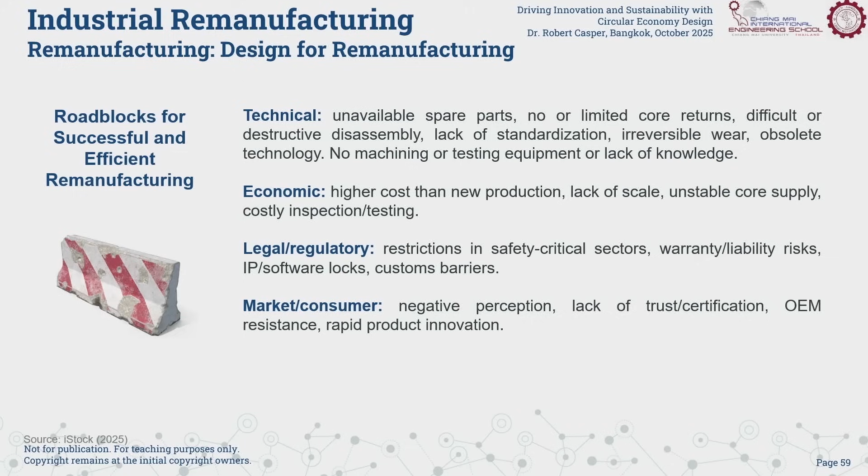Legal, regulatory: certain things sometimes are not allowed to remanufacture, or the companies are not allowing it. They are blocking potential independent remanufacturers from doing it. Market and consumer: probably the market doesn't want remanufactured parts. This is an issue in Asian countries where remanufacturing has a rather negative perception, so people don't buy it.

And as I mentioned, design for remanufacturing is trying, in the design process of the part, to create a design which makes remanufacturing possible or easier.

And this is something I would like to give you at the end: a reman checklist. It's a checklist asking several things, if reman might be suitable for your market, your company, your product. For example, is the market potential there? Does it make sense to build up such a business? Are there supplies for replacement parts? Are there supplies for testing equipment? Is the information there? Do I have reverse logistics? And let's not forget, no core part, no reman, right? You need the basis for reman.

This is from a full dissertation. We have the checklist inside and explained. You can download it here for free.

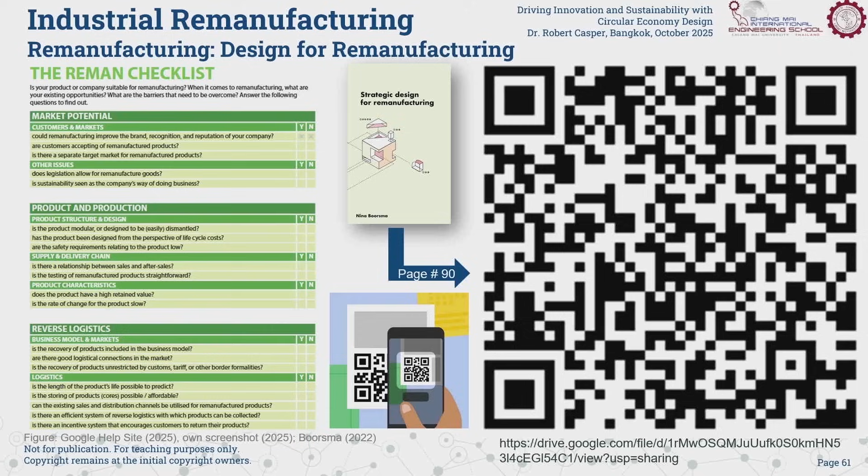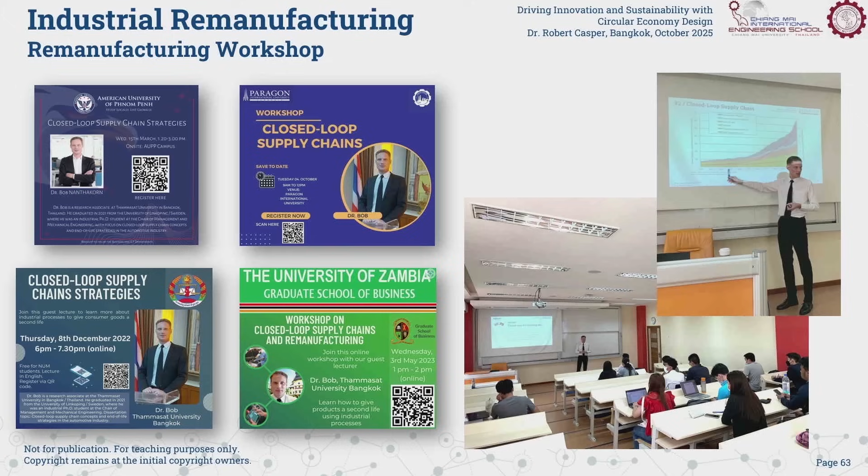I do workshops like this. What I was talking about now, closed loop supply chain, is normally one semester for me, right? So I have like 15 weeks with my students. That was now very, very compressed. There's also reuse and recycling, but I also make workshops with my students on closed loop supply chain remanufacturing. My students love it, because they practically understand what we are doing and why we are doing it.